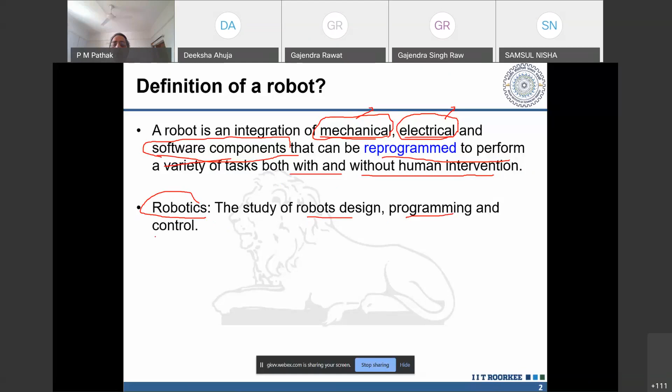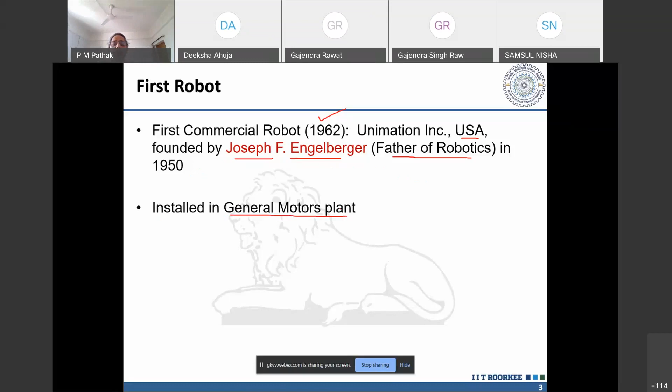The first commercial robot came long back in 1962 by Unimation Incorporation, USA, founded by Joseph F. Engelberger, who is often called the father of robotics. It was installed in the General Motors plant. General Motors is a car manufacturer company, and robots are mostly, or rather the maximum number of robots are used in the automobile industry. So this was the first robot, called the Unimate robot.

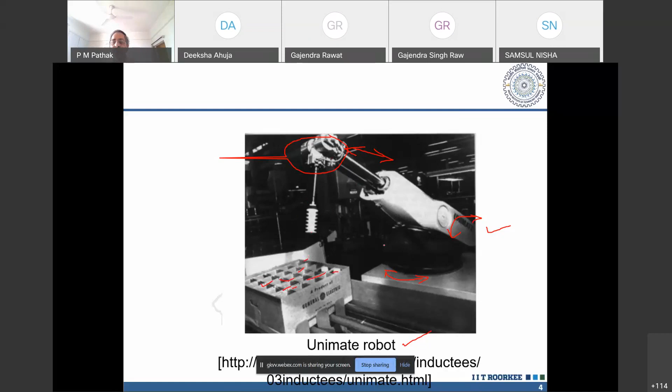Here you can see the physical structure of it. It can rotate in this direction, it can rotate in this direction, so these are 2 degrees of freedom. It can move this way, so this is 3 degrees of freedom. Then the gripper has got 3 degrees of freedom, and here the task was to pick the objects kept in this bin. There are so many slots available in this bin, and the objects were picked from this bin. So this is the sketch.

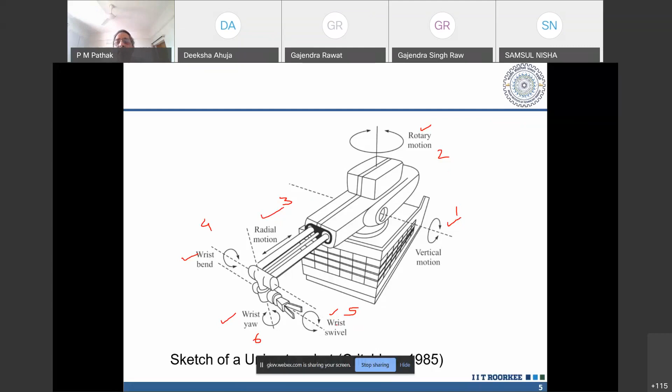Technically speaking, the definition of degrees of freedom is the number of independent position variables needed to specify the position of an object. Suppose an object is there in space, and we ask how many degrees of freedom this object has, so that one can specify its position.

So you have to take a coordinate system, and you can have the CG location. The 3 coordinates you require to represent the CG are X, Y, and Z, and 3 more coordinates you require to represent its orientation. That is, if a frame is attached over here, you need to know how these frames or axes are oriented with respect to the reference axes.

So, orientation and the 3 positions. Any free body which is there in space has got 6 degrees of freedom. If you want to put an object at any position within its reach and in any orientation, your robot should also have the 6 degrees of freedom.

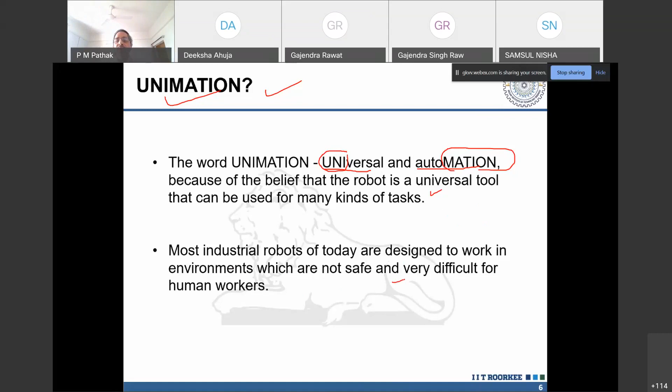The Unimation word basically came from the word universal and automation. You can see 'uni' from universal and 'mation' from automation. This is how the Unimation name came, because of the belief that robot is a universal tool that can be used for many kinds of tasks. Most industrial robots of today are designed to work in environments which are not safe and very difficult for the human worker.

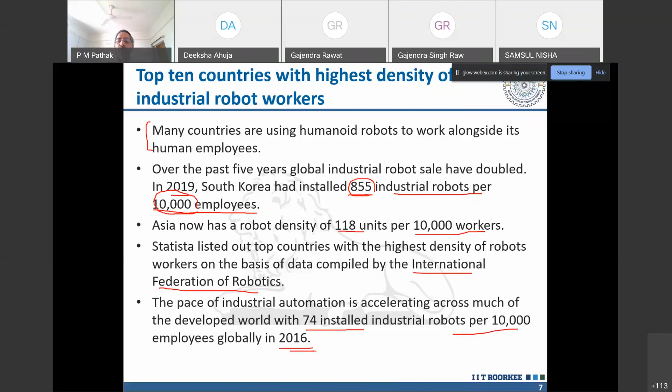Statista listed out top countries with the highest density of robot workers on the basis of data compiled by the International Federation of Robotics. The pace of industrial automation is accelerating across much of the developed world, with 74 installed industrial robots per 10,000 employees globally in 2016. By 2020, the number increased to 113 across the manufacturing sector.

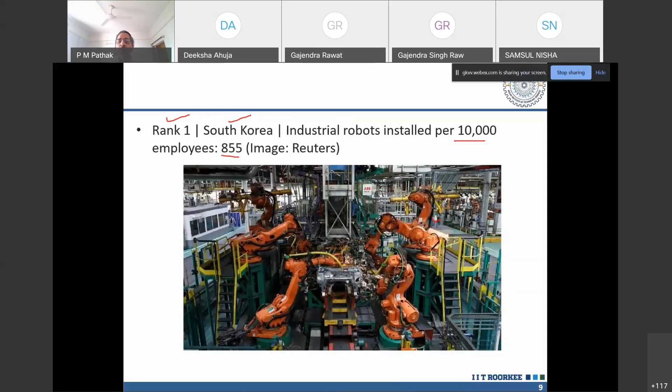Here are the top 10 countries with highest density of industrial robots installed per 10,000 employees in the manufacturing industry. Rank 1 is South Korea, with industrial robots installed per 10,000 employees at 855. You can see a factory environment where industrial robots are used for different purposes.

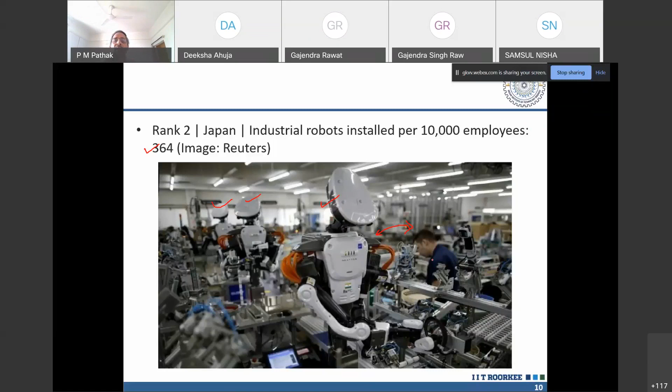Then Japan, it's a leader in the car industry. The industrial robots installed per 10,000 employees is 364 in Japan, and they use the robots for different types of purposes.

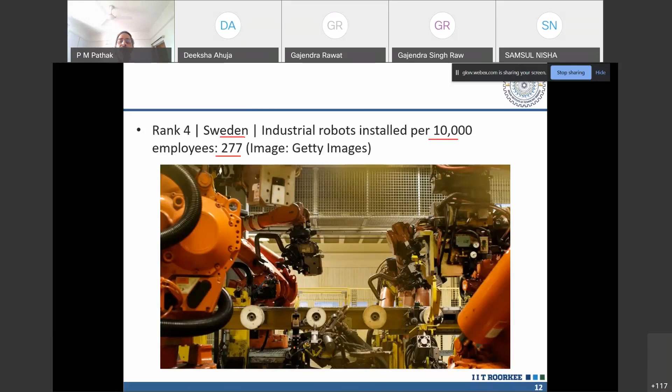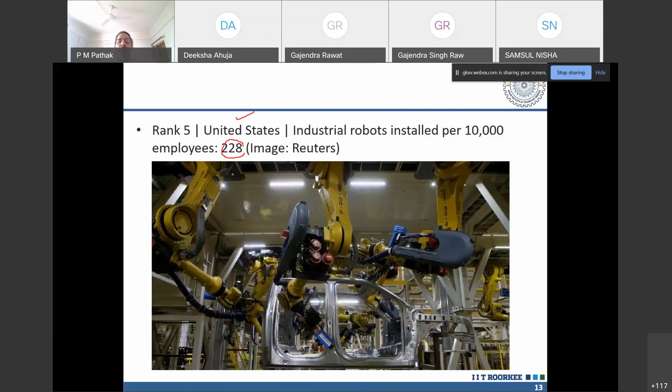Next is Sweden, where industrial robots per 10,000 employees are 277. Then after that it's the United States, where 228 is the number of robots per 10,000 employees. Italy has 212 per 10,000 employees. Belgium and Luxembourg are at 211. Spain is 191. You can see in the car manufacturing industry how these robots are placed to do a variety of tasks on an assembly line.

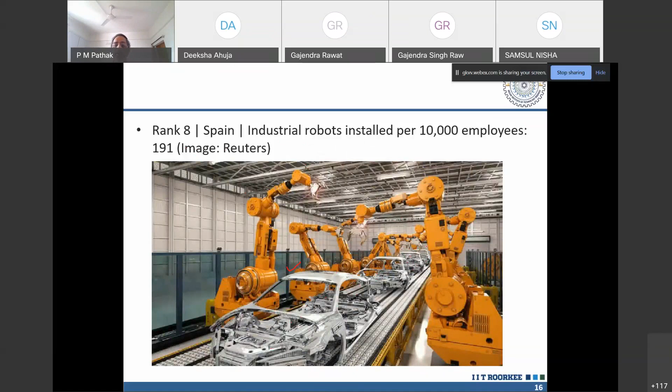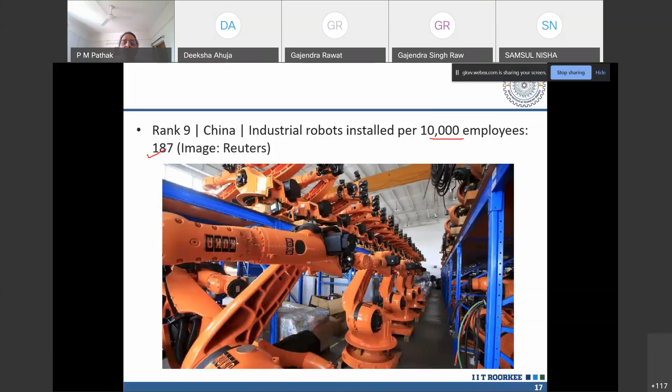Now, as my today's topic is on recent trends, there are many research areas where people are working these days to bring robots to the market. These are robotic devices and systems, which I have already told you about. Then I'll talk about autonomous air, sea and undersea, and land vehicles. These are there for space exploration and development. We keep on hearing news from NASA where they use this. Different types of rovers are there for space exploration and development. Then there are intelligent control systems, which people are working on.

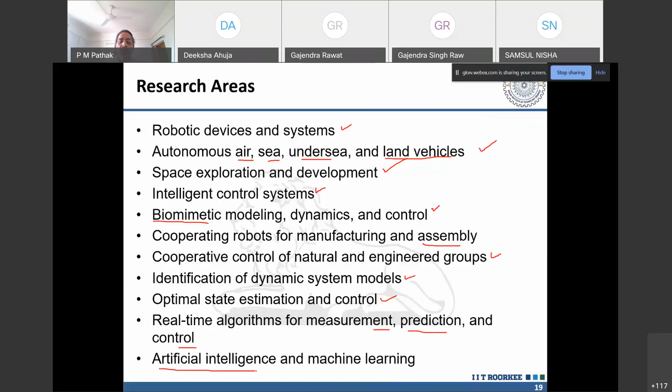AI and machine learning. Then processing of images, because the camera placed on the robot captures images and videos. So image processing, face and character recognition, okay, this is another area where people are working on.

Video analysis and manipulation. Then telecommunication network, autonomous and connected vehicles. I'll be talking a little about this. So connected vehicle means the vehicles are not connected physically, rather the vehicles are connected through, say, GPS or any other type of device where one vehicle knows the position of the other vehicle. That is the concept of connected vehicles.

And autonomous vehicles - all of you must have heard about the Google car, or there are many more cars where people are working to bring the model into the market. Then there are intelligent transportation systems for the transport purpose.

Human factor and human machine interaction. This is again a very promising area where these days researchers are working, where they try to understand the human factors, the issues with manual labor, basically what should be done so that the persons working in an industrial environment do not have

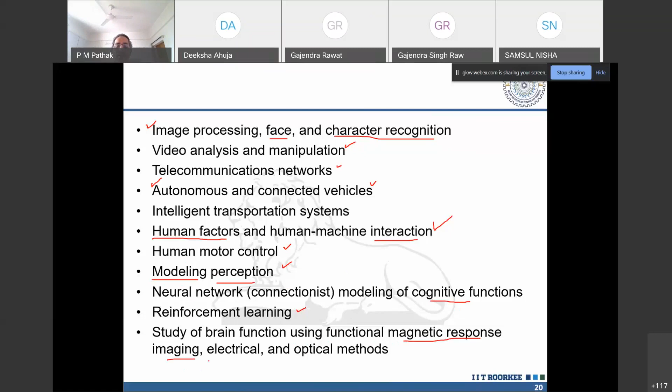Then the neural network modeling of cognitive functions, reinforcement learning, study of the brain function using functional magnetic response imaging, electrical and optical methods.

Then, as I told you, actuators and sensors are very prominently used in robotics. Actuators are used to give motion to the robot, so for different types of robots used at different places, people are working on developing different types of actuators. For example, if you are using some robot for surgery purposes, you require very minute actuators.

So that type of work is going on. And similarly, sensor technology - development of sensors for sensing the external world as well as the structure of the robot's own sensing.

Then biorobotics and bioinstrumentation - control of complex systems, precision instrumentation, autonomous robotic vehicles and optics, deep learning for robotics, human robot interaction as I just talked about, and robot exoskeletons. This is again another very important area.

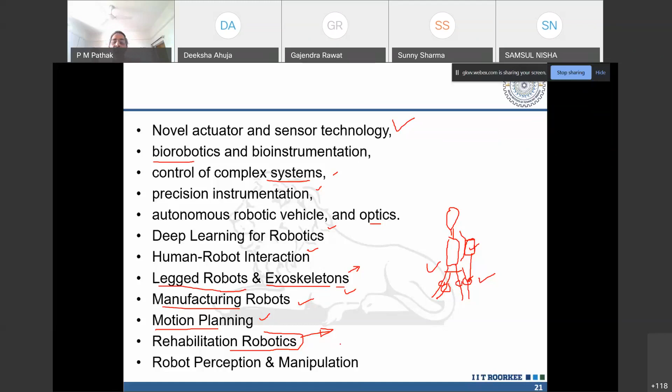Then you have manufacturing robots, as shown in some earlier slides, involving motion planning - how the robot has to move, or how the robot moves. Then there's rehabilitation robotics: if a stroke happens to a person, some body parts become unfunctional, so the person has to be rehabilitated, and robots are used for that purpose. Then robot perception and manipulation.

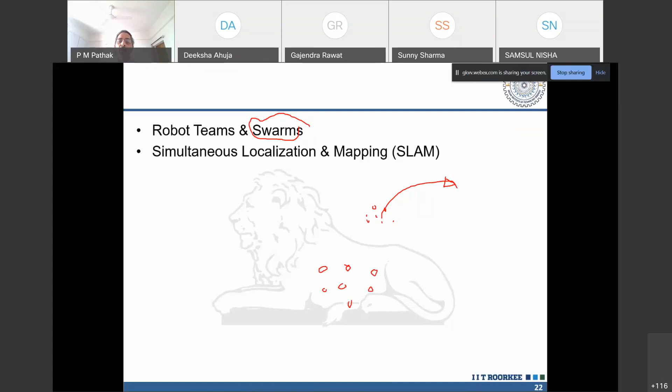Then robot teams and swarms. There's a word called swarm robotics. Swarm comes from bees - there are a number of bees, and they move together from one place to another. The swarm robotics concept is that there are many small robots, and these robots communicate with each other and move together to perform a specific type of task. That is what we call swarm robotics.

Another very important concept people work on is SLAM, simultaneous localization and mapping. Suppose a robot is here - if we are observing it, we can say the robot is here. But how does the robot know where it is? The robot should know where it is with respect to some reference. That is what is called the localization of the robot and mapping of the environment in which the robot is located.

So here is the work I was telling you about. The first one is the mobile robot, named Robotino, made by a German company. It's used for search and rescue, remote control, with robust, tethered. Then there are walking robots.

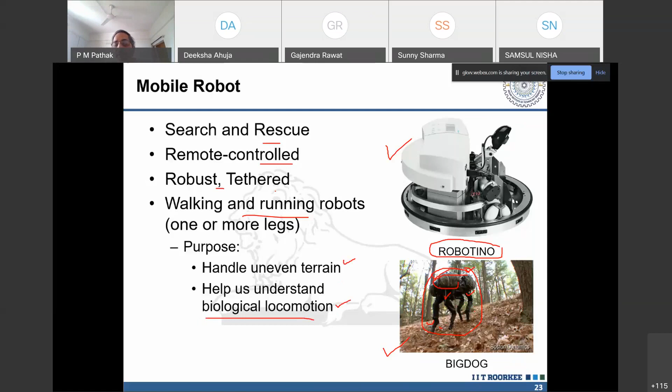The legged robots can move on uneven terrain, and they also help us understand biological locomotion - how biological animals move. For example, when they walk slowly they have one type of gait, and when they run they have another type of gait.

Then there is an area called space robotics. Here in this figure you can see solar panels for powering the satellite, and suppose this is a separate part that has to be integrated into the satellite. One can have a robot like this, which can pull this part and integrate it into the satellite. This type of job is done by space robots.

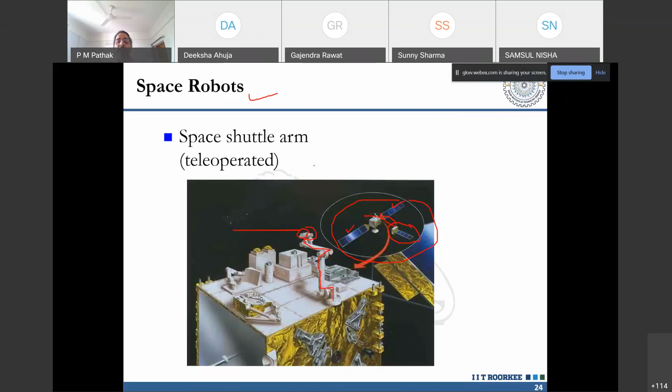These are tele-operated, that is remotely operated. This picture shows Dextre, a two-arm robot developed by Canada's space agency. This is the first arm and this is the second arm, and this two-arm robot can be used to do a variety of tasks.

Here are the different types of systems it has: a camera and light system, hand tools and grippers, force and moment sensors to measure forces and moments, and a tool holder. There are many more devices. These types of robots are called space robots, and they are used in space.

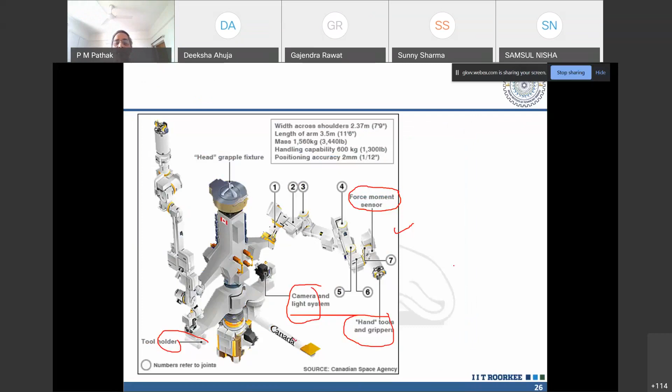Then there are robots used underwater. These robots are difficult to control because, like in space, you don't have an inertial frame to take the reactions. That is one of the major challenges in space and underwater robots. Here you can see the underwater robot, this is the gripper, you have a camera, sensors, and a propeller to move it forward. This can be used for underwater investigations.

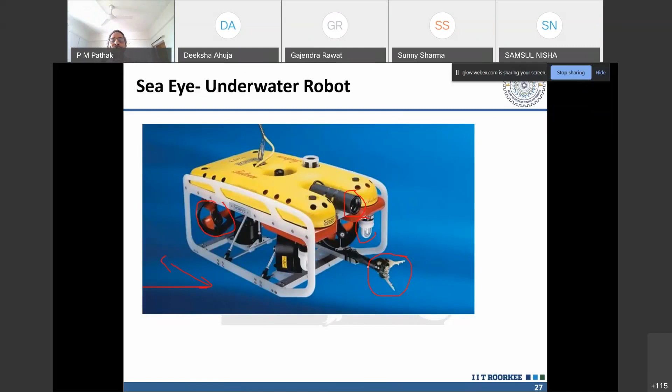After talking about all this, let us see how robotics has evolved in the last 10 years. Driverless cars, as we all know, are not yet in the market, but in San Francisco a company has got the license to test these driverless cars. So in the next 5 to 10 years, we can see such cars in the market. These are all developments of the last decade.

Then you have e-commerce robots. Amazon, Flipkart, whatever things we order, we get them quickly after ordering. Warehouses are equipped with robots to do various types of tasks, I will be talking about them. And the robots are used for that purpose.

Then you see the surgical robots which are used for surgery. Till now, there is a robot called Da Vinci, which is the only one available in the market and used by many hospitals for surgical procedures. But it is expected that in the near future many more such robots will come, which can help surgeons in performing surgery.

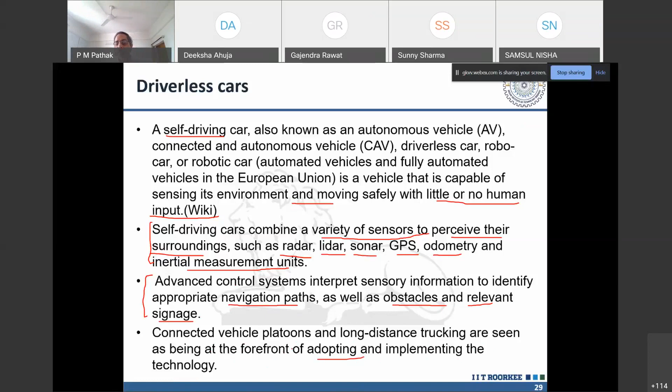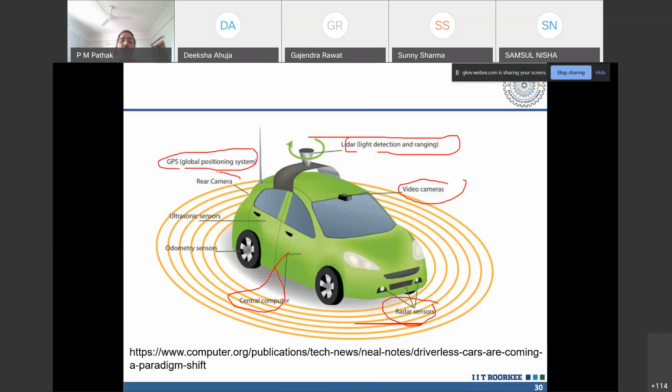Here is a computer generated image of the driverless car. You can see a central computer here, and here are the sensors - radar sensor, video camera, lidar (light detection and ranging), GPS, a rear camera, ultrasonic sensors, and odometry sensors. All this sensor information is sent to the computer, and based on this information, the computer takes the decision for the motion of the car.

Somebody has unmuted his transmitter.

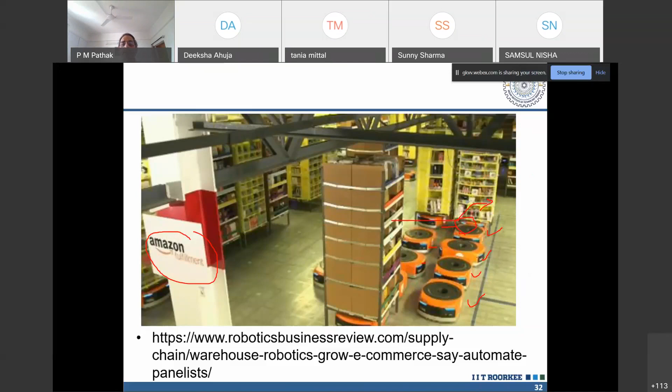So all these are robots, and these robots are used to take items from one place to another. Not only that, they can also pick up items. They can have an arm, and they can pick up the correctly labeled items from these bins, and then those items can be moved. So this is what all work has been done in the last decade.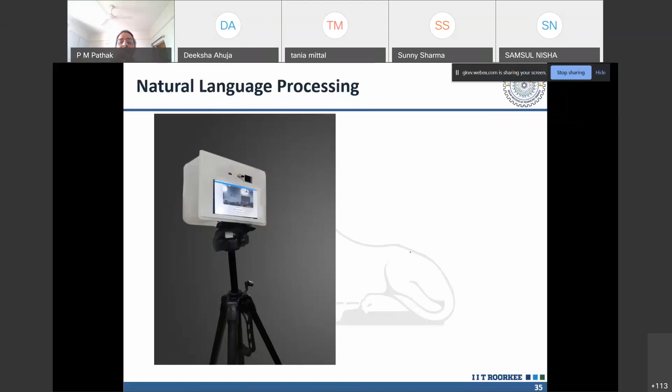Just have a look at this. The purpose of this robot is that patients who come in and have fever should be segregated from other types of patients. There should be provision for registration of patients so they can keep track, and the robot should be able to take the temperature. So this is the robot we have developed, and it's currently at the final testing phase.

Is it audible? No, sir, we are not able to listen to the audio. Can you see the video? We can see the video but unable to listen to the audio. Okay.

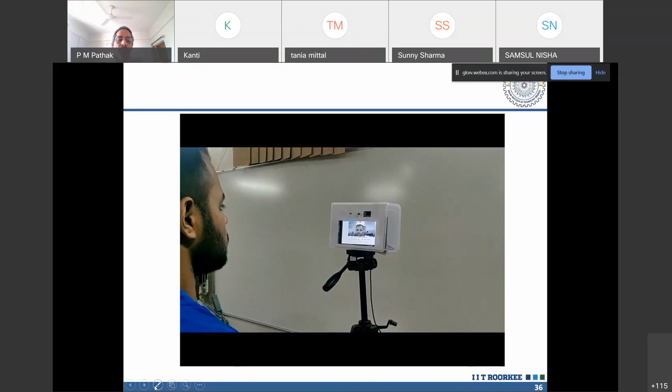So it asks for the address, it asks for the mobile number, it asks for the name, and then it takes the temperature.

Sorry to disturb in between. Actually, we are not able to enlarge the screen. Can you do that? Because it is so small in this. Screen is not able to enlarge. Yes, sir. Very small screen is visible. We are not able to read anything visible on it.

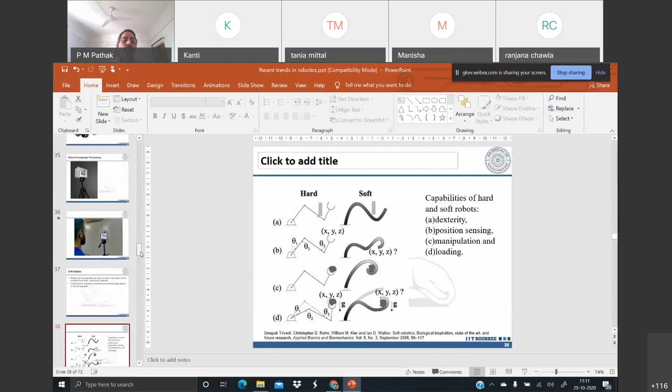No, ma'am, there are two arrows below the PowerPoint screen. Just click on them, the video of sir will get minimized and you'll be able to see the PowerPoint presentation on the whole screen. Actually, I'm working on a phone. Yeah, even I am doing it on phone only. It's working, ma'am, please try it. On which side, ma'am? Left side or right? Yes, it is working. On the left side, just below the PowerPoint screen, there are two arrows, one towards up and the other towards down. Okay, let me check now.

Okay, so this is how it does it.

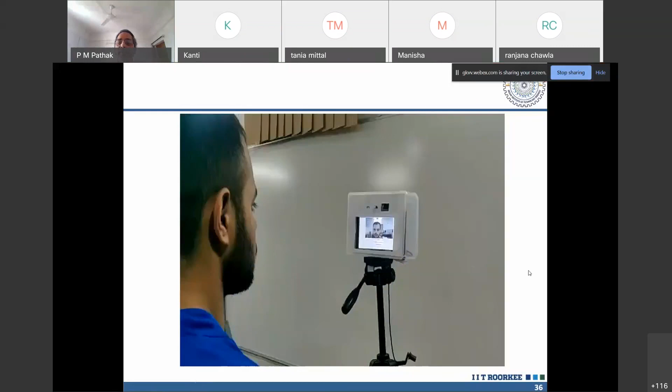And as I said, this robot is under the testing phase at IIT Roorkee, and we hope to see this soon in Max Hospital, Dehradun.

Okay, next is about the soft robot. As the name soft tells you, this basically means something which has got compliance. And these robots exhibit large strain in their normal operation.

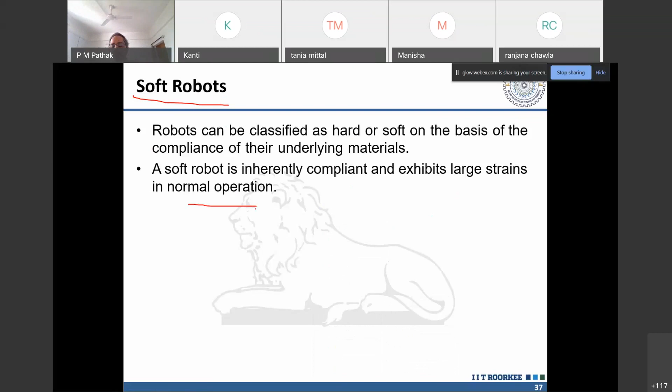Here I can quickly explain the capabilities of hard and soft robots. If the hard robot, which we have seen earlier, has rigid links, and suppose this is the obstacle, then if the joint rotates here, it's likely to hit the obstacle. But in case of soft robots, you can see it can deform, bend, and easily avoid the obstacle.

So this is the advantage of it. Another advantage is about gripping. If the hard robot has to grip an object, it has to do it like this, but a soft robot can be gripped in this way, which is a better way of gripping the object.

But there is a problem of sensing and loading. Sensing problem is that in case of hard robots, we use joint sensors, and these sensors can sense joint rotations very easily with the help of, say, potentiometers or encoders or other measuring devices. But in case of soft robots, these lengths have to be measured basically, and that is a little problem. Although people are trying to do it with the help of linear potentiometers, but still that is a problem.

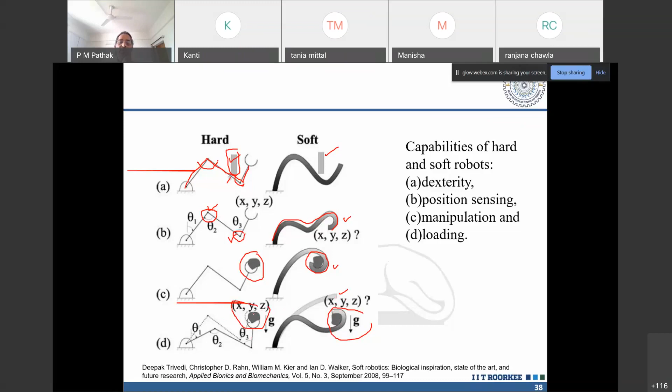Then loading in soft robots causes deformation in the robot, and because of that, it is difficult for the robot to be at the exact position. Whereas in hard robots also, because of loading, some deflection is there, but that is manageable.

There are other bionic robots, for example, the flying bird, the one which you might have seen in the UP movie. This is the robot made by the Festo company, and there could be robot muscles. You can see these are the muscles basically, the pneumatic actuators, which provide strength to the muscles, and with the help of these muscles, these fingers can be actuated. So this is the bionic one basically.

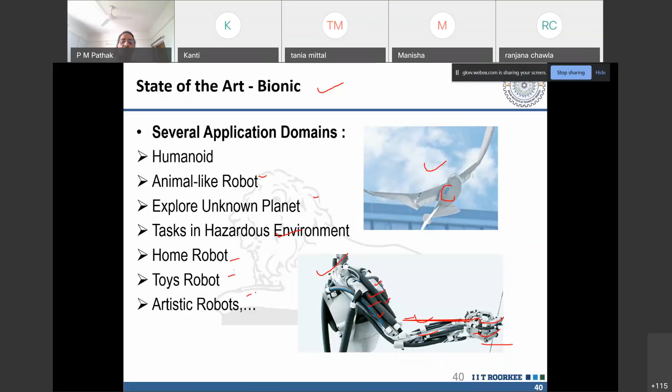So animal-like robots can be used to explore unknown planets, work in hazardous environments. They can be home robots, toys, artistic, and so on. So this is the soft robot which I was talking about.

Yes. Okay, anything anybody wants to say?

Okay, this is the bionic manipulator. Basically, there are 5 segments here: 1, 2, 3, 4, 5 over here, and these are pneumatically actuated. And yes, they can handle different types of objects.

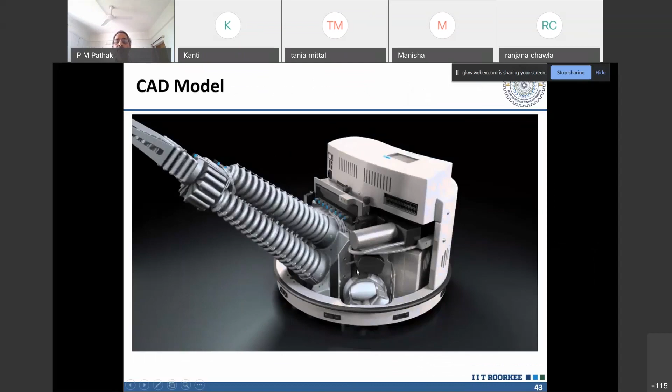No, so this video maybe it is not working. So this is the CAD model of that. Here are the solenoid valves basically. No, it is not working. No, I'm sorry, these videos are not working actually. I can show them directly.

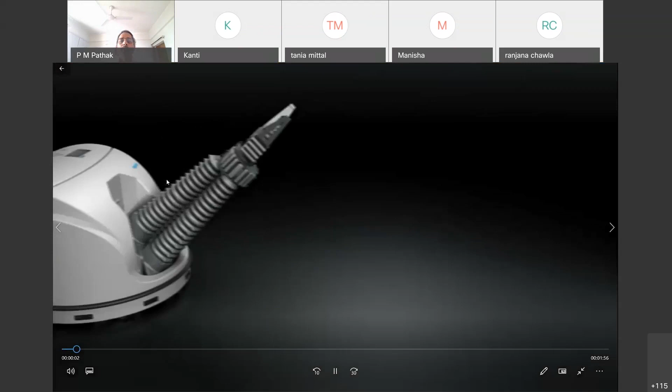Are you able to see the video? Yes, sir. Yes, sir, it's visible. Sound, we can hear.

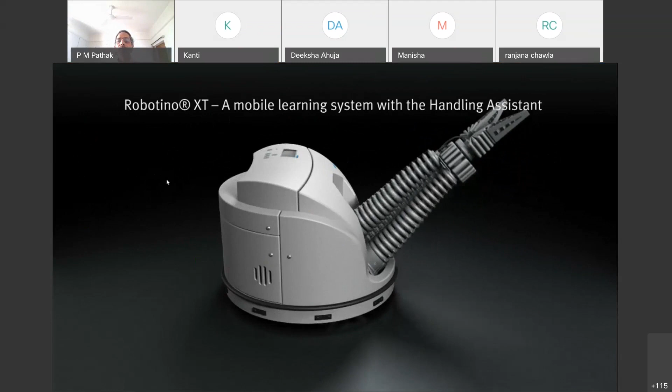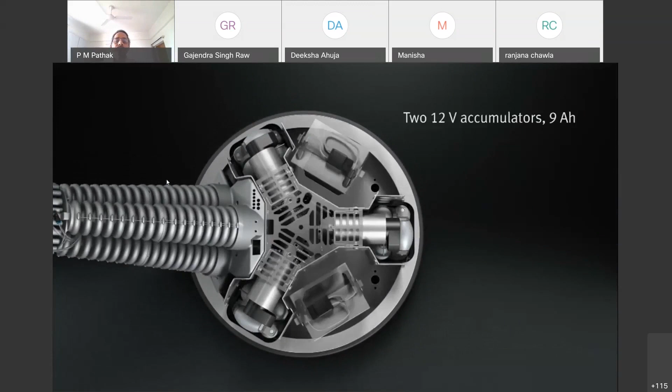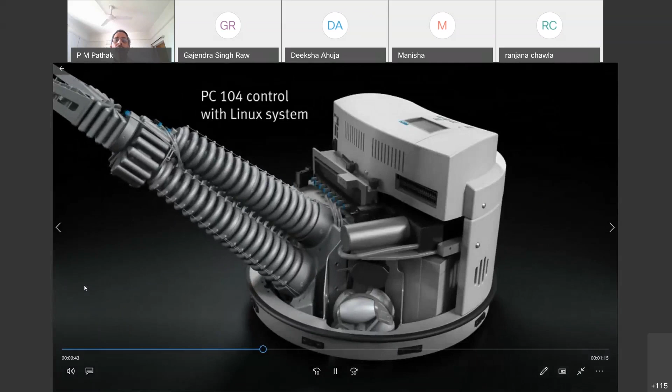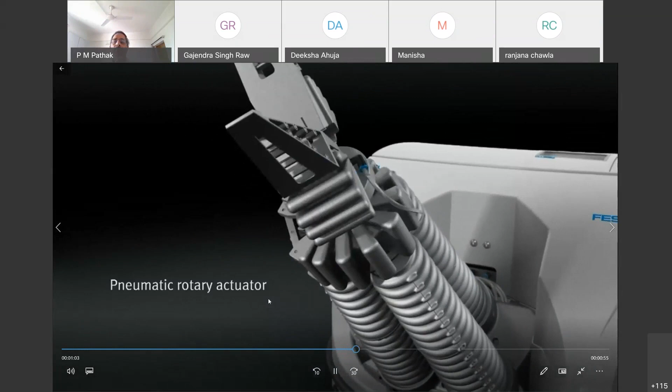Yeah, so this is how these soft robots are there. You can see the wheels over here, and these are the potentiometer wires which I was talking to you. This is how the tubes are made basically. This is the gripper.

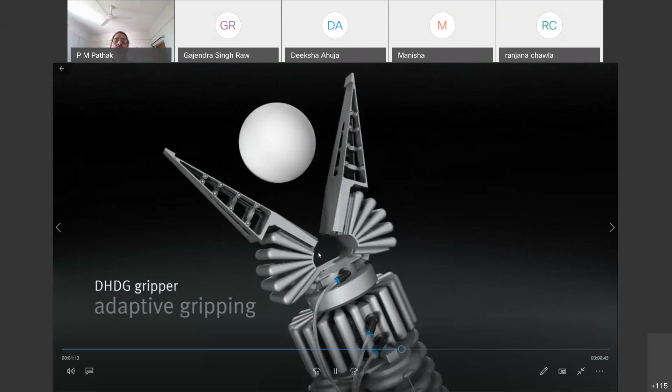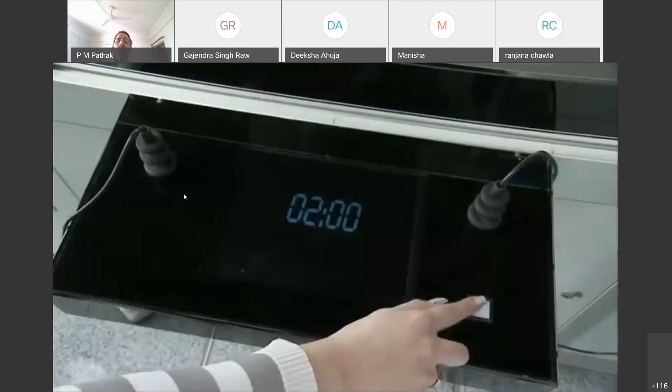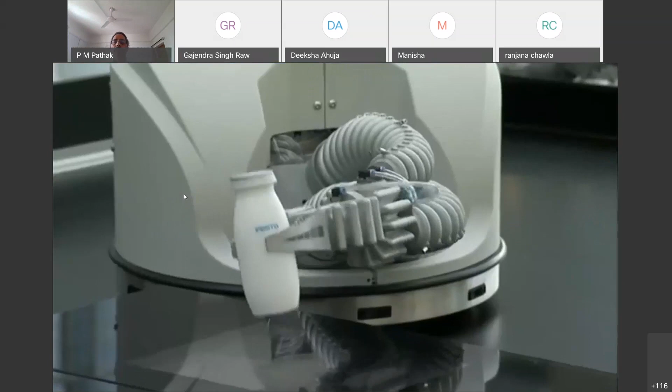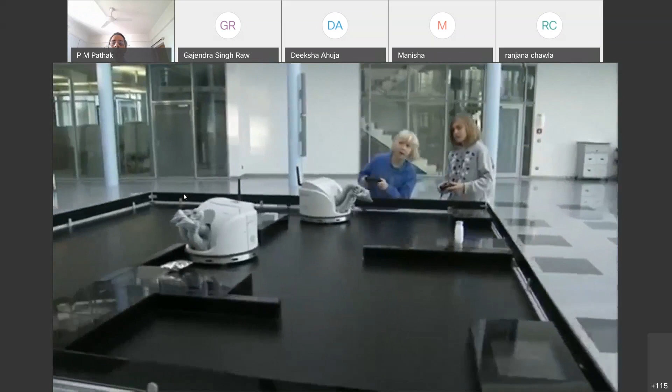Okay, so this is how these bots are used.

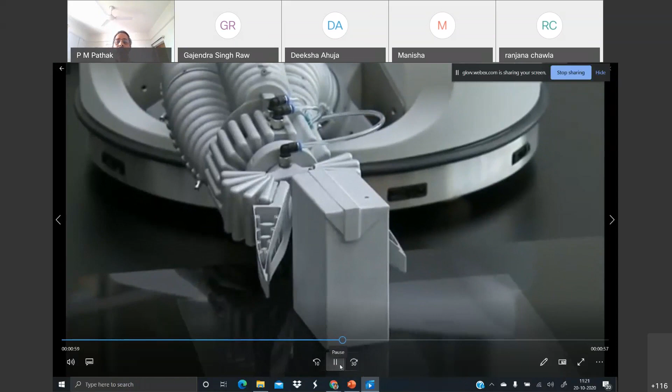Then we can have the cooperative motion planning of these bots with the help of two such robots. Say an object is being handled by the left and right robot together. So that can be done.

Next we are going to talk about another type of robot, the snake one, the biomimic. Why biomimic a snake's behavior? Due to their elongated form and lack of legs, snakes have a compact cross section and thus can move through very thin holes and gaps.

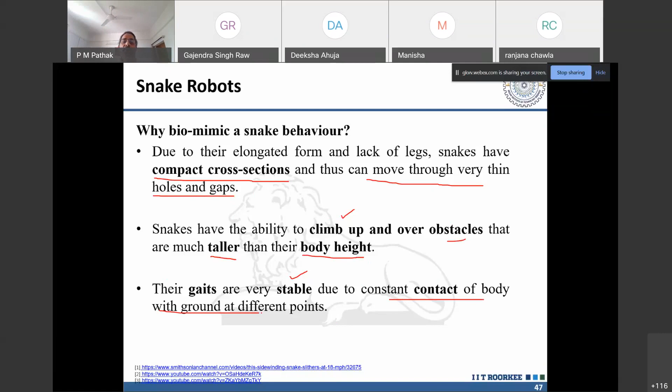That is the advantage snakes have, and they have the ability to climb up and over obstacles much taller than their body height. Also, their gaits are very stable due to the constant contact of the body with the ground at different points.

So there are four common and distinct gaits. Gait basically means the way they move. There are four common and distinct gaits that snakes normally use in their movement: serpentine, that is lateral undulation, then concertina, side winding, and rectilinear progression. These are the four types, and most snakes are capable of executing all or several of these locomotions.

Okay, and generally they switch as per the requirement. So they can perform all types of motion, and they can switch, like we walk and when we desire we run. There are different types of gaits for that. Likewise snake can also switch and change their gait. In some situation it may even use a combination of more than one gait.

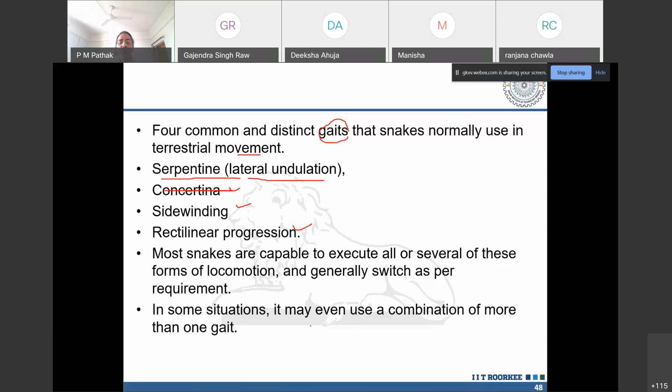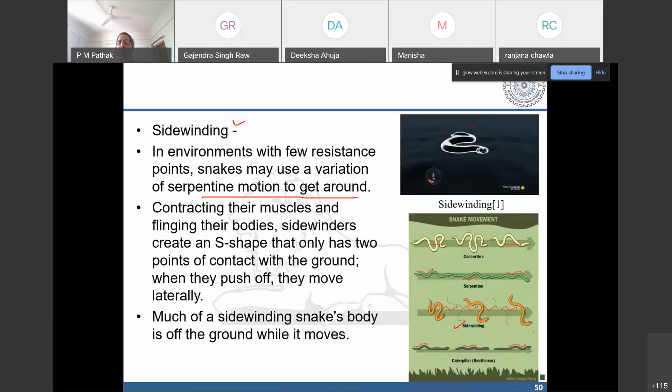Then there is what we call side winding, as you can see here. This is how they do it. In environments with few resistance points, a snake may use a variation of serpentine motion to get around. By contracting their muscles and flinging their bodies, sidewinders create an S-shape that has only 2 points of contact with the ground. When they push, they move laterally, which is why it's called side winding. Much of the side winding snake's body is off the ground while it moves. This rolling movement has been explained a little more here.

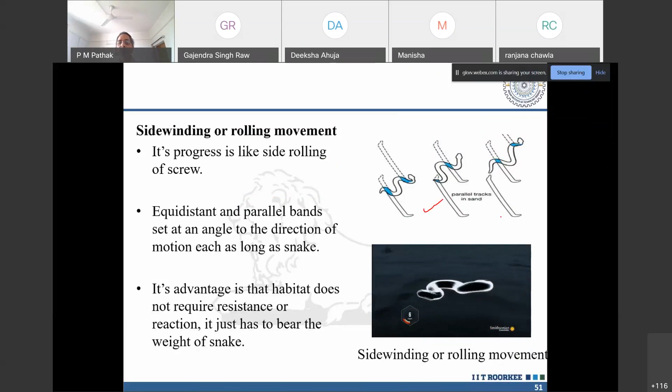Then you have the caterpillar type, you can see here the caterpillar, that is this one, the rectilinear motion, the last one in this figure. It is a much slower method of movement, called caterpillar or rectilinear motion. This technique also contracts the body into a curved form, but these waves are much smaller and curve up and down rather than side to side, as you can see in this figure. There is not much side motion in this case. These are the points of support from where the snake gets the reactions, and then it moves.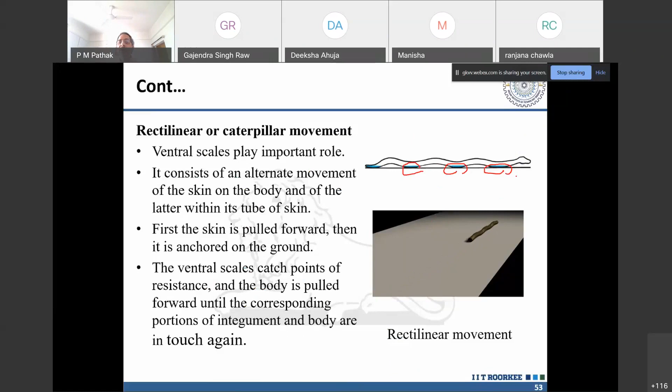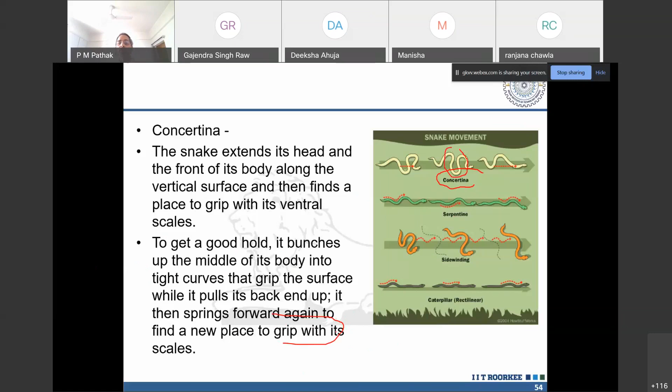Then there is a gait called concertina. In this one, the snake extends its head and the front of its body along the vertical surface, then finds a place to grip with its ventral scales. To get a good hold, it bunches up the middle of its body into tight curves that grip the surface while it pulls its back up, and then it moves forward. So this is how we try to implement this type of gait here. You can see the caterpillar or rectilinear motion, this is how it moves.

This is the side winding where it moves forward by moving to the side, and this is the lateral undulation type of gait.

And many times to design these robots, we do some simulation activity, write the mathematical expressions for the robot, create a model, and then do the simulation. Okay, I'm sorry, this probably will not move. Yeah, so that we do.

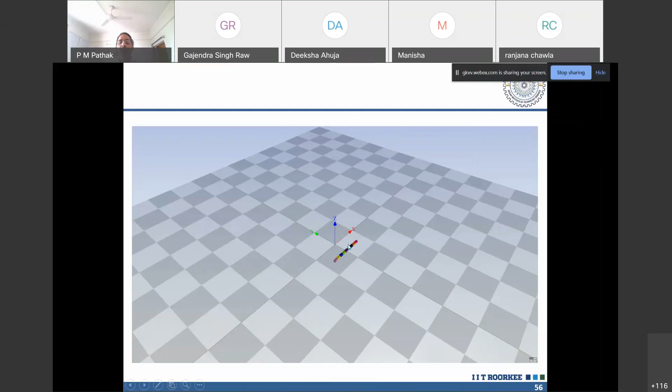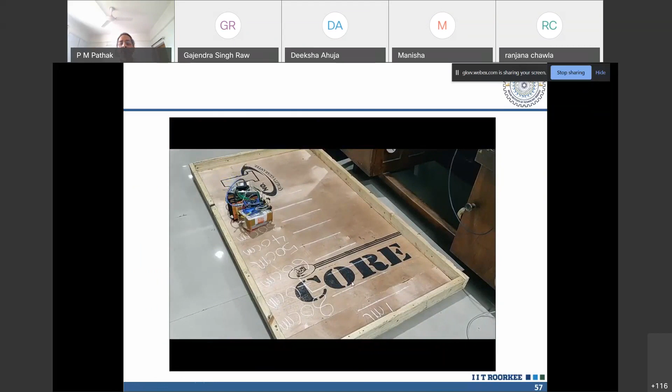And in this figure you are seeing this video, this is again a snake robot, and this is a bionic one that is pneumatically actuated, a different type of pneumatic actuation. It's wireless, and we are in the process of patenting this design. The earlier ones, which videos I showed, those actually used electrical motors. Here we are using a pump basically to create it.

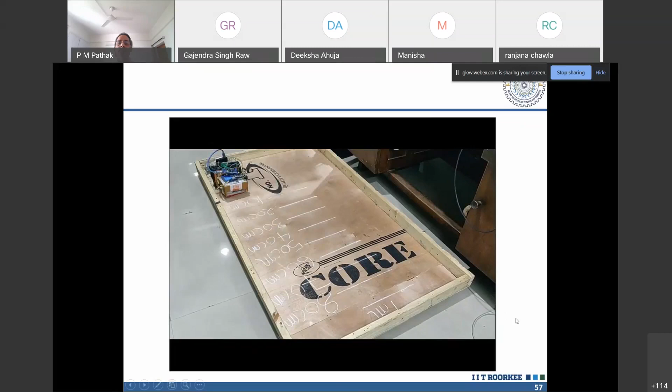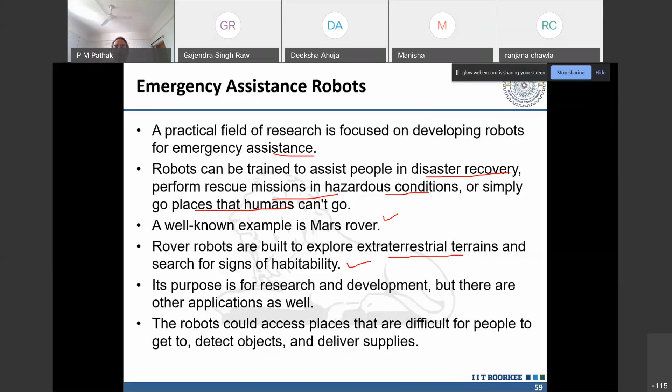Emergency assistance robot focuses on developing a robot for emergency assistance. They can assist people in disaster recovery, perform rescue missions in hazardous conditions, simply go to places humans cannot go. Mars rover, we know that, a rover robot built to explore extraterrestrial terrain and search for signs of habitability. So all these are there.

Can I continue for 5 more minutes? Yes sir, yes sir, sure.

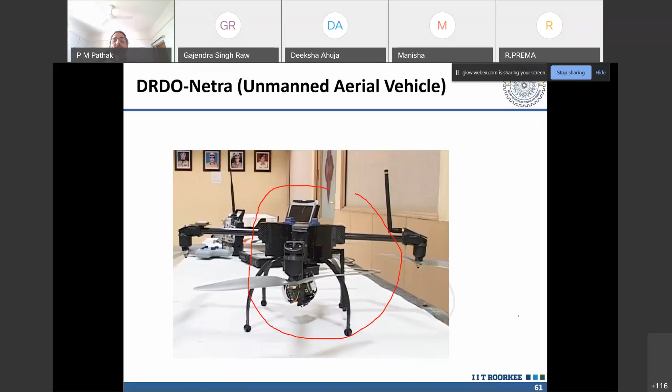Then there is the DRDO Netra unmanned aerial vehicle. This was used a lot during the Uttarakhand tragedy a few years back. There was a lot of flooding, and this was used for identification of persons. This is the Netra.

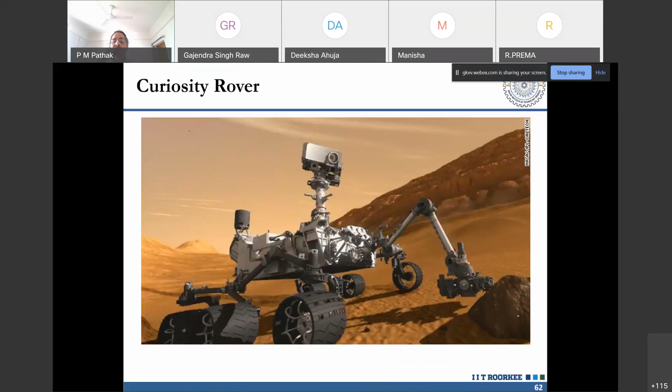Then the home robot, as I was telling you, there is a lot of work going on for the home robot. We are also doing some work in that. These robots are developed for consumer convenience. They are programmed to help people with everyday tasks, for example cleaning a home without human supervision.

So Neato D7 is the latest vacuum robot that has embedded sensors to help map the layout of the home. It can map the layout of the home, remember where not to go, and the area which has already been cleaned so that it need not repeat that. That is Neato D7, and there is more room for improvement.

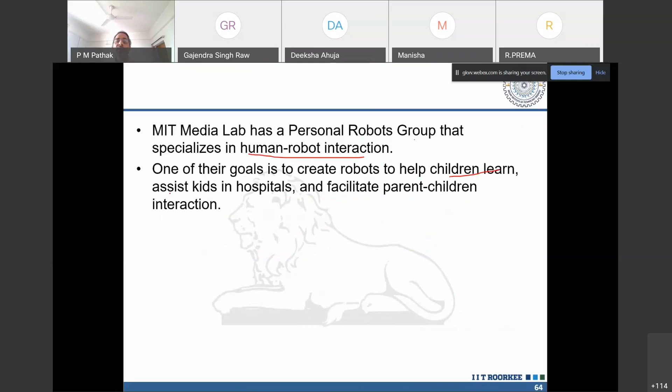On how home robots learn about and respond to their environment, MIT Media Lab has a personal robot group that specializes in human robot interaction. One of their goals is to create robots to help children learn, assist kids in hospital, and facilitate parent-children interaction.

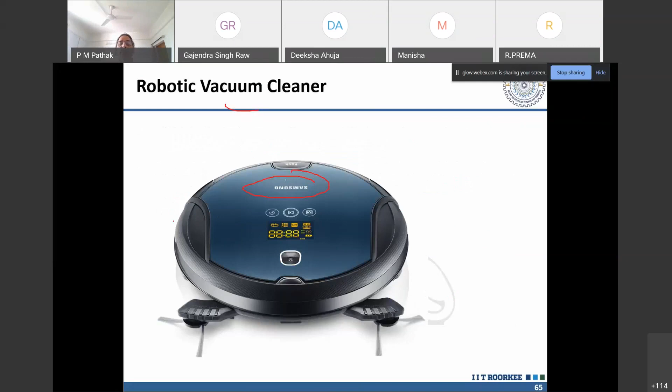This is the robotic vacuum cleaner, which is available in the market, and which can be used for the cleaning of your house.

Then, as I was talking about the gaming robot, gaming is a big industry. One of the industry leaders is DeepMind, whose mission is to develop robots that can learn to solve problems autonomously. DeepMind's robots' thinking abilities are self-taught, and for example, the company's AlphaGo robot is programmed to play the Chinese strategy board game called Go, which involves obtaining territory. So there are gaming robots.

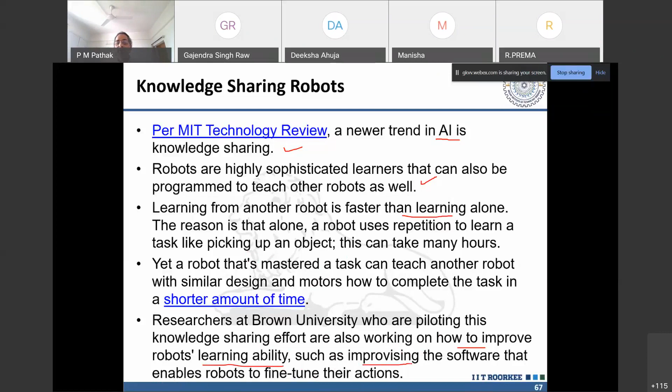Then, as I was telling you, the knowledge sharing robots, a newer trend in artificial intelligence, is knowledge sharing. Robots are highly sophisticated learners that can also be programmed to teach other robots, and learning from another robot is faster than learning alone. Researchers at Brown University are piloting this knowledge sharing effort and also working on how to improve robots' learning ability, such as improving the software that enables robots to fine-tune their actions.

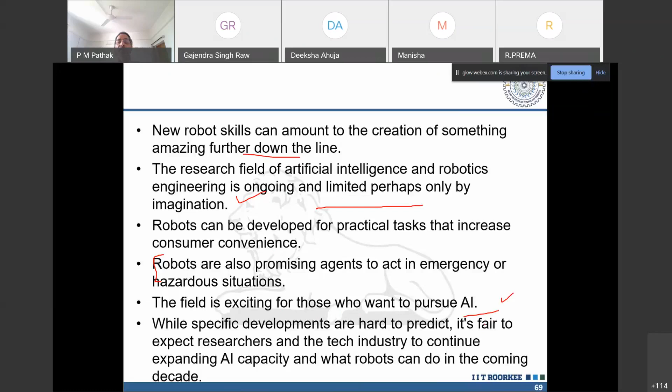So I think with this I would like to conclude my lecture. There are new robot skills which are coming. There are areas in artificial intelligence which are going to help robotics a lot, and these are promising agents for emergency hazardous situations. It's an exciting field for those who want to pursue artificial intelligence. You can see the application of artificial intelligence in this.